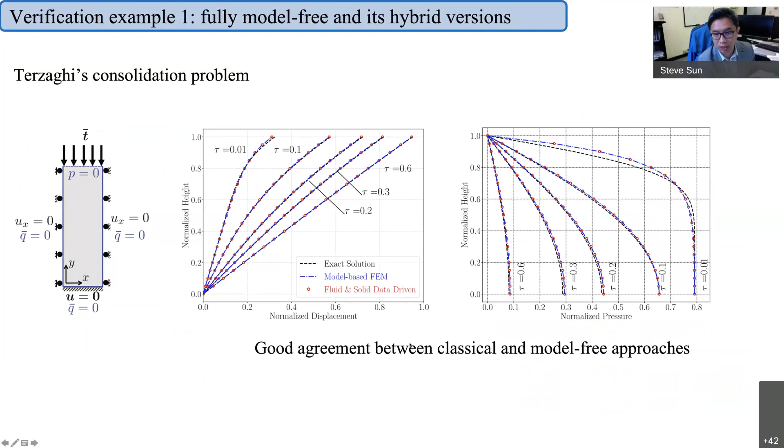So we compare first with the linear problem, which obviously doesn't require a model-free approach. This is just to check the model is correct, whether we use a model-free or a fully data-driven approach when we are given enough data points. These are the details of the constitutive response predictions. One thing we can observe is that when we don't have enough data points, the constitutive response obtained tends to lack smoothness over time.

This is simply because when the point cloud in the constitutive manifold is more sparse, the choice of data we have is less. And hence you can see artificial oscillations, which supposedly can be resolved by adding more data points. And this, by the way, is just a 1D problem. So it illustrates the fact that the model-free approach could work, but when we don't have enough data, we also need to deal with the fact that the lack of data would lead to a model response that is less smooth than expected.

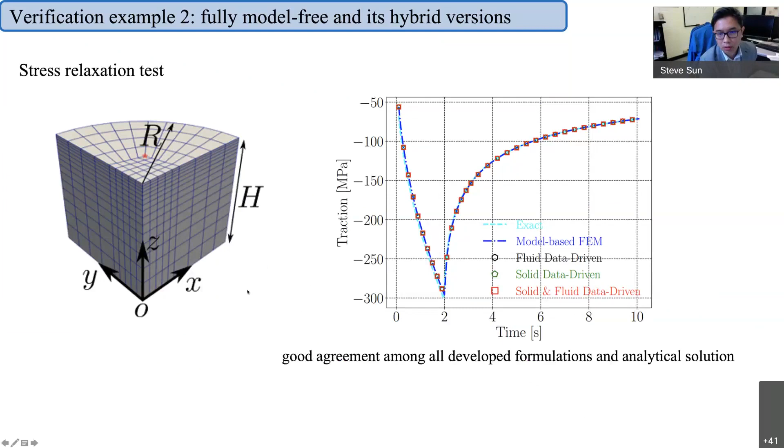This is another comparison in stress relaxation. Our goal is to simulate a porous media. A porous media, when compressed, even though the solid response has no path-dependent behavior, because of the diffusion of the pore fluid, it will lead to stress relaxation. So here we first again generate a linear database where we simply check the correctness of the implementation, and then we check whether the algorithm functions on a nonlinear model.

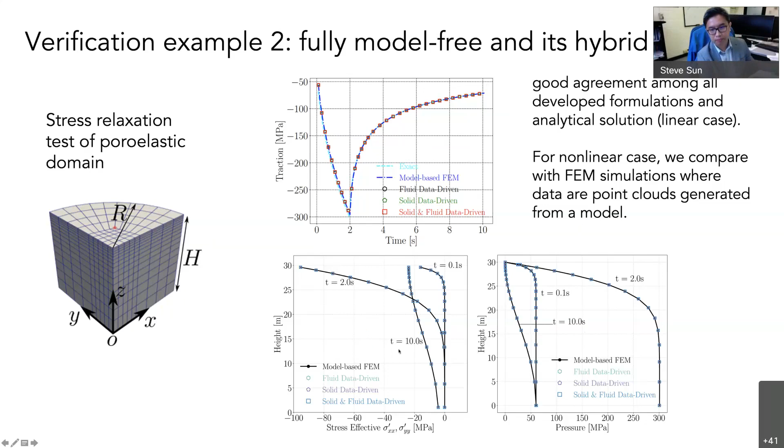In this case, we use the finite element as the benchmark, and we generate the data from a model to create a point cloud, and then we examine the constitutive response. As you can see here, when sufficient data are available, the model can converge correctly.

This is another simulation for the model-free approach, in which case we use real sandstone data. As you can see here, the porosity-permeability relationship is in a point cloud with very high variance. We can use the Kozeny-Carman equation to get the mean behavior, but the mean behavior doesn't necessarily capture the physics or even the trend of the constitutive law. For that reason, it makes sense to try the model-free approach where we simply map the constitutive point into the available data points.

And this is a fully coupled problem where we apply the displacement with a no-flux boundary, and we see how the pore pressure builds up and how the water moves inside the domain. In this case, we use a hybridized formulation in the sense that the solid mechanics come from a model. Only the hydraulic part comes from a data-driven approach.

The reason is that for the solid constitutive response, we can get a reasonable stress-strain curve that doesn't have high variance with reasonable accuracy, in particular from classical triaxial compaction test data. And this is the response we get. The domain is heterogeneous with porosity fluctuating in space, and we can run the calculations and compute the pore pressure.

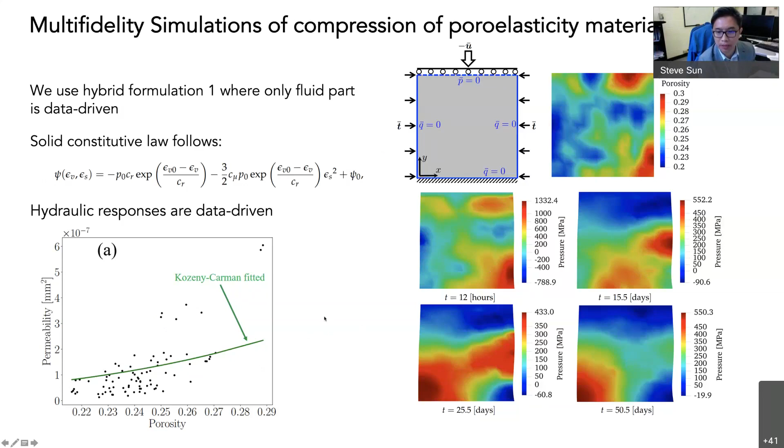So if you look at one particular quadrature point in the domain, what you will see here is that, as we actually run the simulations, it's choosing different data points in the material database instead of trying to make smooth predictions.

So this could make sense when we could not write a good constitutive law that is able to capture all the points, or in this case, deal with the high variance. You can see the analogy. This is actually very close to a case in neural network training where it's very overfitting, in a sense. We will probably get a very similar behavior.

So there is some ongoing work. Actually, my student told me not to show all the steps, so I will just show the results. But here is the idea. If you think about it, the material constitutive response is not linear. So assuming that the data is in a Euclidean vector space is not necessarily the best approach. The reason is the notion of distance.

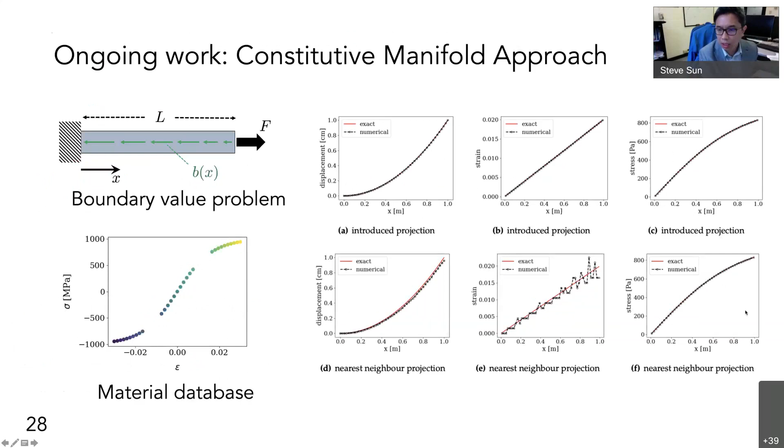You can see that even in this case where there's a big hole in the database, we can get a good result, whereas the classical distance search would lead to oscillations in the strain field. Another ongoing work is to deal with the model-free problem when we don't have enough data. Again, we can compare the two approaches. In this particular case, we simply try to apply the constitutive law on a truss system.

One interesting thing we find is that if we don't have enough data, even though the material is completely elastic, nonlinear elastic, we may actually create a seemingly path-dependent behavior just due to the artificial effect of the search and also the lack of data points. But when we consider the manifold approach, we may actually get a smooth response.

So the key thing we try to convey is that we try to think about the right approach when we deal with different amounts of data. How do we switch the strategy, and also how do we measure? One thing in this research we find particularly exciting is that it's not just, given the amount of data, how do we generate a model, but how do we properly measure the notion of distance?

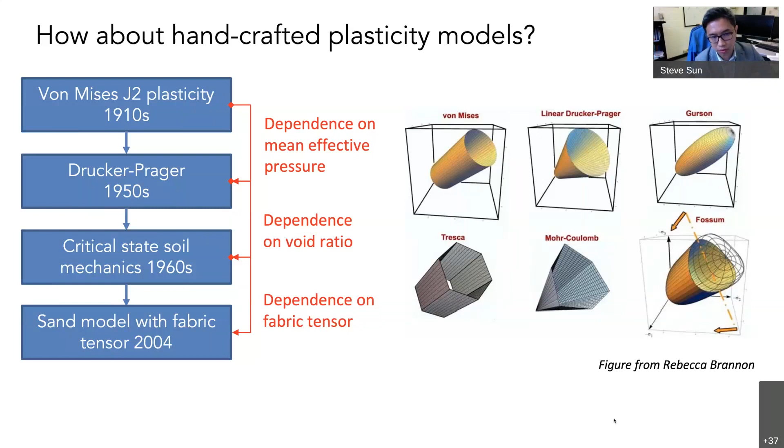So I want to talk a little bit about the history of the constitutive law. Handcrafting a constitutive law, as we all know, is a very time-consuming process. You can see in this figure, it takes almost 100 years from von Mises J2 plasticity to a sand model. But how many 100 years do we need to wait when we have so many new materials, or metamaterials, getting designed? So there's a demand to automate this process in some sense, and to take advantage of the model to also improve the data collection process.

So the classical approach, by classic I mean a few years ago, is to use the recurrent neural network to generate a constitutive model for the path-dependent behavior. But then there is a problem in this approach, in the sense that when we actually use the strain history to predict the stress, it's really difficult to assess the thermodynamics or the admissibility of the constitutive law. For example, without the split of the elastic and plastic strain, it's hard to analyze what energy is getting stored, what

is the energy dissipation. So we use an alternative way where we cut the whole learning process into two steps: the training of the elastic energy functional and the training of the yield surface. In particular, the training of the elastic energy functional has been talked about in the literature quite often, but here our focus would be on how to train the yield surface.

Okay, so in particular, if we simply try to parameterize, find the optimum parameters of the yield surface, we won't be able to discover anything new. So how do we make the learning problem as general as possible and not make it too difficult? That is actually one of our goals in this research. So for lack of time, I will probably go over this a little bit faster.

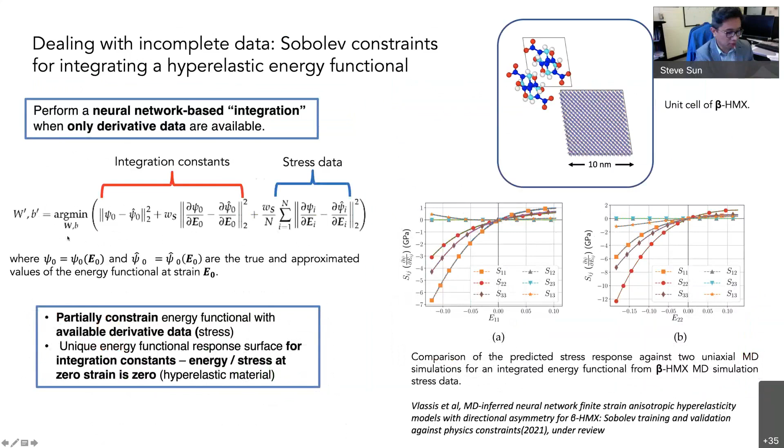So here we basically try to enforce two things, material frame indifference and symmetry. We introduce a test where rotation tensors are put into the deformation gradient, and we check whether we get the same energy when we change the observer orientation. And we also check whether, for the symmetry rotations, we can maintain the same constitutive response.

And another thing that we can do is to check the acoustic tensor behavior. So when we compute the tangent, for a given orientation n, we obtain the acoustic tensor, and the eigenvalues of the acoustic tensor give us the wave speed of the material. In this particular case, we can find the minimum wave speed, and we can ensure that the constitutive law leads to a stable result by ensuring that the wave speed is not going negative.

I think for the sake of time, we don't have time to go through that, but I also want to say that for the tuning of the hyperparameters, we also made an attempt at training it with reinforcement learning, and we can find the optimum set of the data.

And also for the level set training approach that we introduced, one of the important things is that it demands a degree of continuity. So while we can choose the hyperbolic tangent activation function to enable that, what we actually found out, at least empirically, is that using ReLU seems to be a good choice if we can introduce an additional multiplication layer to increase the degree of continuity. So the idea is very simple.

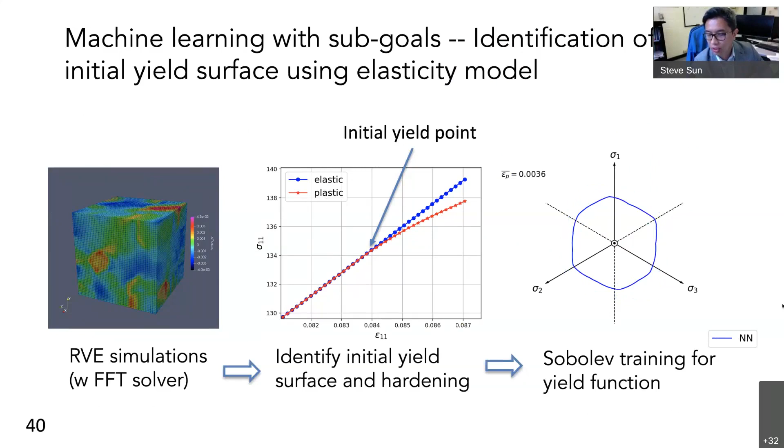So there is previous work on using NURBS to identify the yield surface for perfect plasticity. The problem is that when a material shows plastic behavior, the yield surface can evolve in any arbitrary way possible. From a solid mechanics background, if we study J2 plasticity, we all know that the yield surface can enlarge in the stress space or move in the stress space. But in general, the symmetry of the yield surface can also change. It can also rotate. So one of the most generalized ways to represent that stress-strain behavior is to create a parametrization of the yield surface along with the cumulative plastic strain.

So in this case, we formulated the yield surface evolution as a Hamilton-Jacobi equation. You can think of this as very similar to training a PINN problem where we try to solve that Hamilton-Jacobi problem with the yield surface corresponding to the principal stress and the accumulated plastic strain. The only difference here is that we only need to train this PINN problem once, and the result would be a constitutive law that can be reused many times as a replacement of the classical return mapping constitutive law.

So I think I'm about to run out of time, so I will just talk about the basic idea. In this particular paper, we can obtain the yield surface, and then if we continue to load the material, we can observe the plastic strain, and from that we can record the evolution, and then by adding the data and the governing law of the Hamilton-Jacobi equations, we can change the yield surface so that it evolves with the cumulative plastic strain or any internal variable.

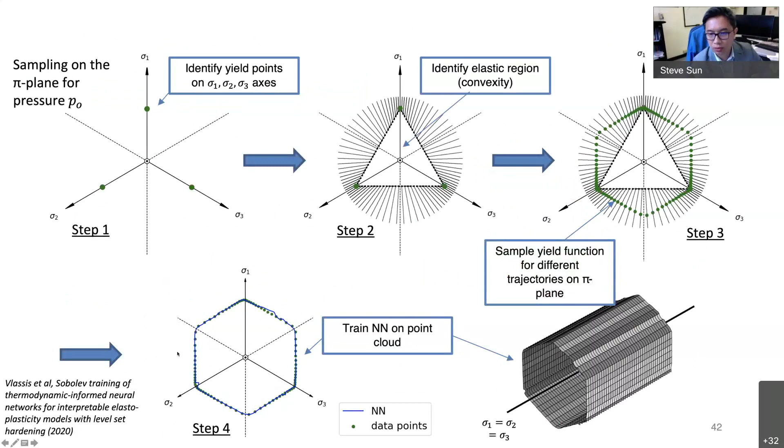In this case, then we would generate a lot. We can generate as many data as we want in the principal stress space, in addition to the Hamilton-Jacobi equation to train the model. So in this particular case, with the assumption that the yield surface is also a signed distance function, the experimental data can help us capture how the yield surface evolves in time, and then the resultant constitutive law in this particular case can be put into a classical return mapping algorithm.

We can also use the plastic strain increment to introduce a non-associative flow rule, as this example shows. We don't necessarily need to change a plastic potential. We can, but we can also compare the rotations between the stress gradient and the plastic flow direction to generate a non-associative flow rule. This is actually the difference between simply training a yield surface and assuming that the yield surface is a signed distance function.

And the implementation is actually very simple. This is also one of the attractive points of the level set plasticity model, in the sense that if you have a production code or constitutive law that already has a return mapping in the strain space, you simply need to replace the classical elastic energy functional and the yield functions with the trained functions. The neural network that predicts the stress response, and the neural network that solves the Hamilton-Jacobi problem, will be put in here and here respectively.

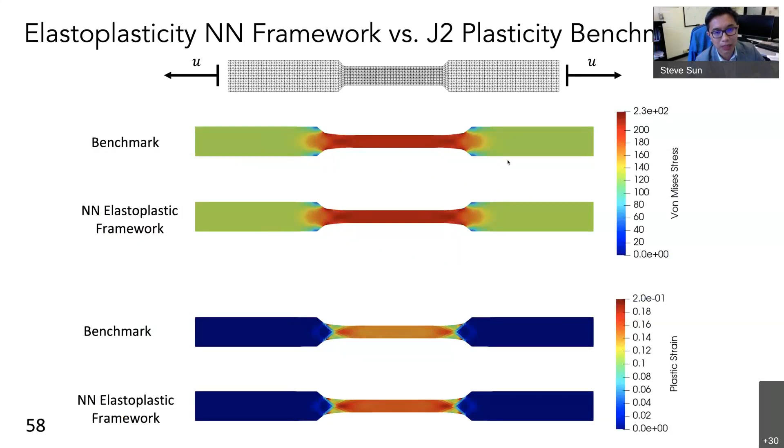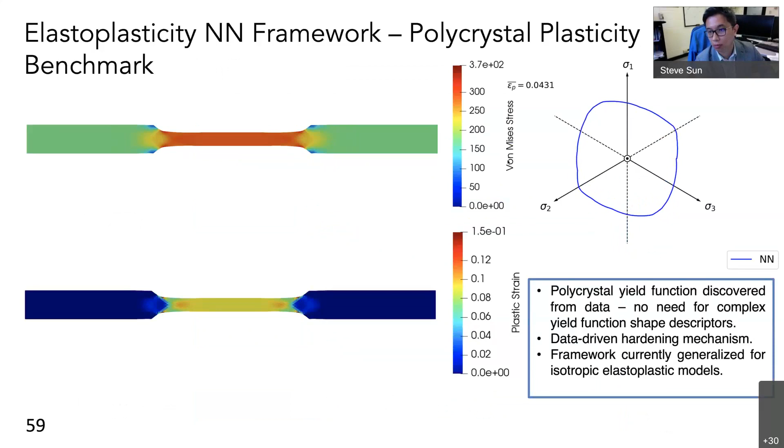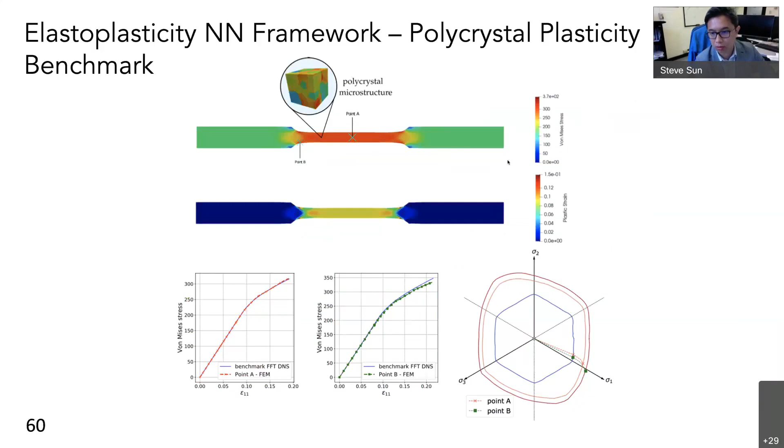compatible model. So we're using this to replace the classical FE² approach, in this case the FFT finite element approach, in which we have a polycrystal, we train it with the neural network, and then replace the FE² approach. As you can see, we can run the polycrystal simulation without associating each Gauss point response with expensive FFT simulations. And not only that, we can discover a macroscopic model that has interesting physics in it. So this is the comparison between the FFT simulations and the surrogate model. As you can see, the results are reasonably close.

We also think about how to expand this research. In particular, what we haven't talked about is the way to incorporate the internal variable representation of the memory. One of the reasons that the material demonstrates path-dependent behavior is the memory effect due to particle internal rearrangement. And this could be very effectively represented in a graph. The microstructure can be represented by a graph, and there could be a way to capture how the graph evolves during the plasticity loading, and we can connect it with the physics.

So in this case, instead of handcrafting a fabric tensor or porosity or whatever physical internal variable to constitute a constitutive law, we will directly generate a low-dimensional representation of the graph, and then use the evolution of the encoded feature vector to incorporate into the constitutive law response.

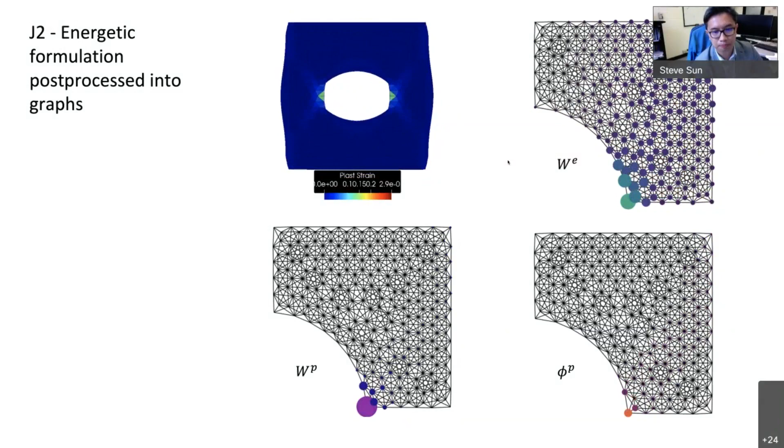So with that, I think I already said too much, running out of time. So I will say the following. In the constitutive law problem, we more or less deal with different amounts of data. What we can control is the training and the hyperparameters and then the method. But one thing that, at least based on my personal experience, is very important is not necessarily finding the latest gadgets or the neural network architecture that can solve the problem, but to think about how to formulate the problem properly.

And I think in this case, I showed a few examples where we are given the same amount of data, but depending on how we use those data to make predictions, we can get very diverse responses of different quality and robustness.

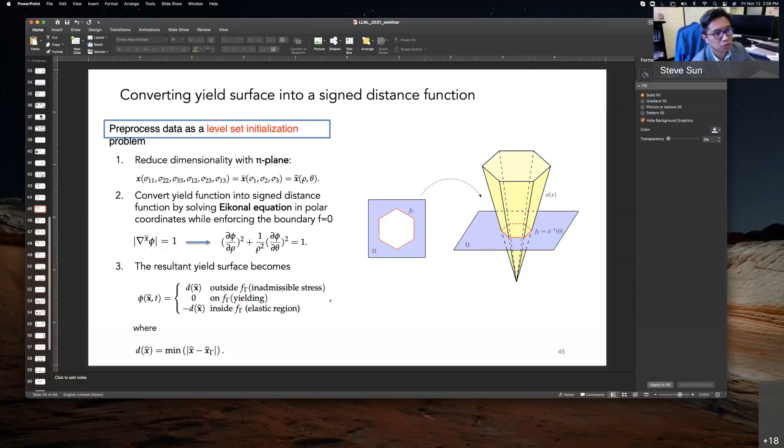I don't think so. Although strictly speaking, if you have a nonlinear constitutive response, because you compute sort of artificial energy from that energy norm, maybe I can show that energy thing. If your material is actually nonlinear and your C is constant, you do have a perception that would bias towards some point over the other, but it's not inherently there. This is just because of the norm you choose. Again, if the data set is linear, then every point is treated equally.

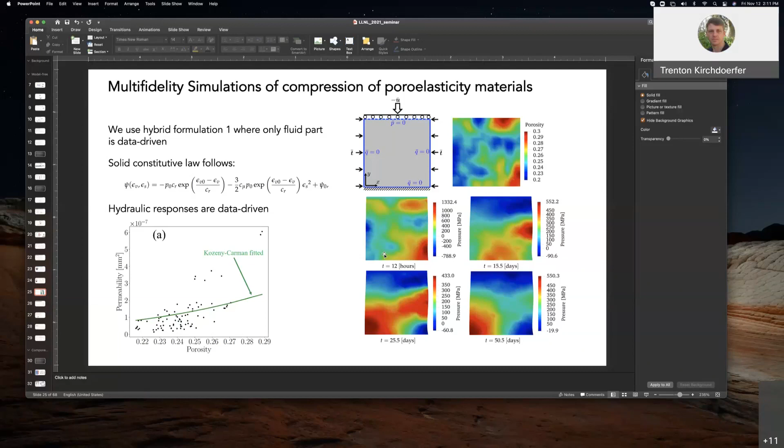So the algorithm finds that, like, we don't assume how to do that. The algorithm finds the closest data and just substitutes it in the equations. So over the course of that migration, your boundary conditions are constant? In here, if I remember correctly, I think I increased the boundary displacement. So the lateral compression is fixed, but that U is increasing during the time. Okay, so that makes sense.

So basically, that was kind of my internal question, I have seen migrations of data points under fixed boundary conditions. Oh yeah, definitely. This is a transient problem. I gradually increase the compression from the top. Because it's a poromechanics problem, it has multiple time steps. Well, my question was mostly whether it was at a single instant in time or whether this was over the entire simulation. Yeah, from the beginning to the end.

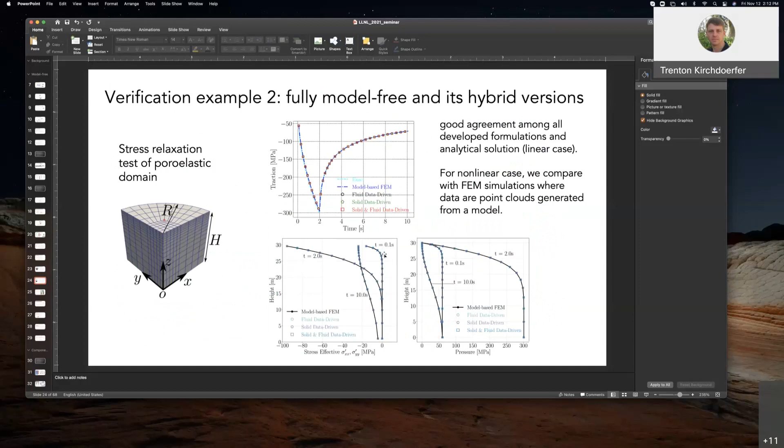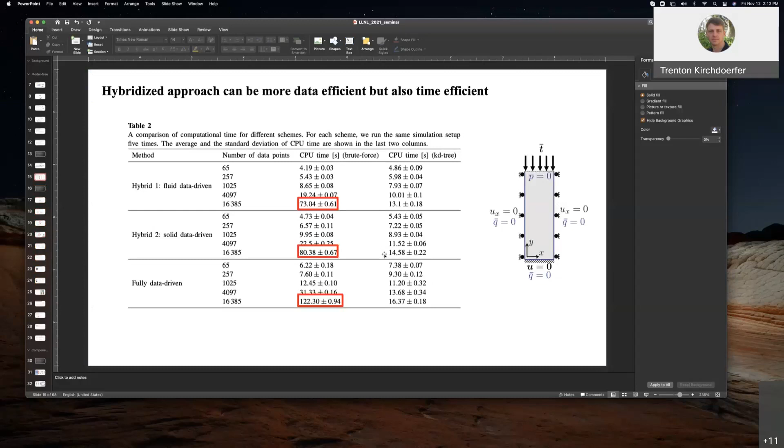Cool. And then I did have one other question about your discretization. So when you add time to your constraint equations, well, we don't necessarily need the exact one. In the past, when I've done that, I needed to make a specific numerical approximation to set up that constraint. Did you guys have to do that, or was there a different space you were able to make that constraint in?

Yeah, I think that idea also comes from earlier work. Professor Ortiz, with Raul, has done some work on that equivalent static thing: it discretizes in time, has a discrete Lagrangian, and then finds the minimizer. So we basically follow that idea, just for convenience more than anything. Discrete in time, at each time instant you're solving a local quasi-static problem, and then we update to the next step. Yeah, exactly.